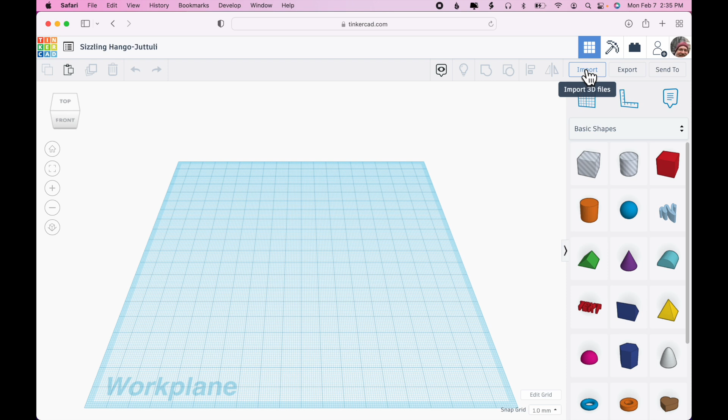So let's get started. Create a new design. You should know now that you can drag these primitive shapes out onto the work plane and build your model from scratch. But you'll notice that there's an import button up here, which implies that we can import files as well. You'll see that Tinkercad supports STL, OBJ, and SVG files.

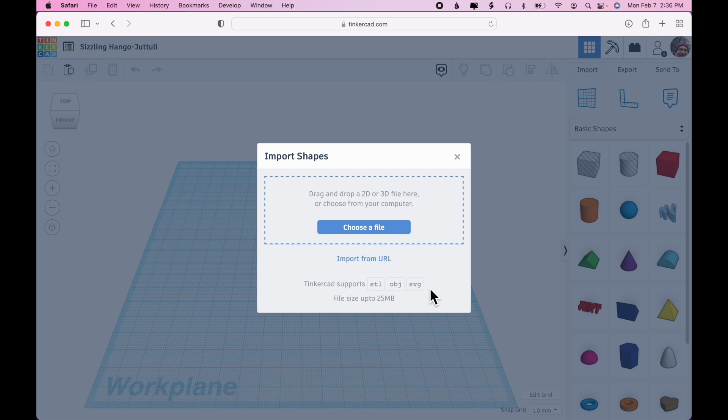STL files you're familiar with, that's what we bring into our slicer to prepare for printing on the printer. OBJ files, you'll get some experience with those in Forger 3D, the sculpting app. When you use that, you can export your sculpted models from Forger in OBJ format, which implies you could import those models into Tinkercad. So you can create a very organic shape in Forger and bring it into Tinkercad and add more geometric shapes to it. The third file type is SVG, which is a scalable vector graphics file format, a 2D image format. That is interesting as well.

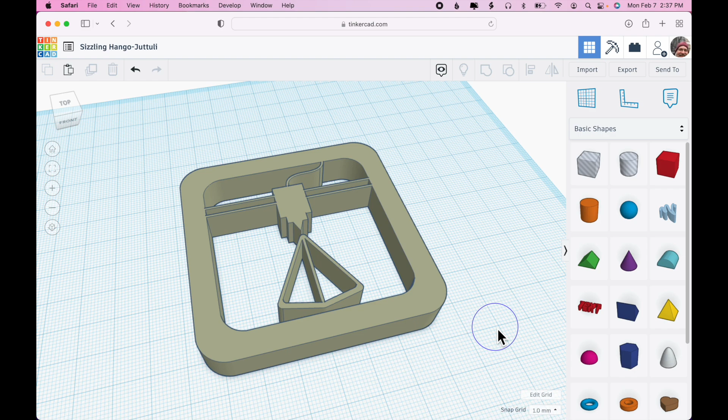What I'm going to look at now, I have a 2D logo image in SVG format. I'll choose upload, artboard, sure, just bring it in. Okay, there it is. So you can see what it did was Tinkercad took that SVG file and just gave it some dimension. And I'm not stuck with that - I can increase it, or reshape it any way I wish. Let's see, what did it give - a 10 millimeter height by default.

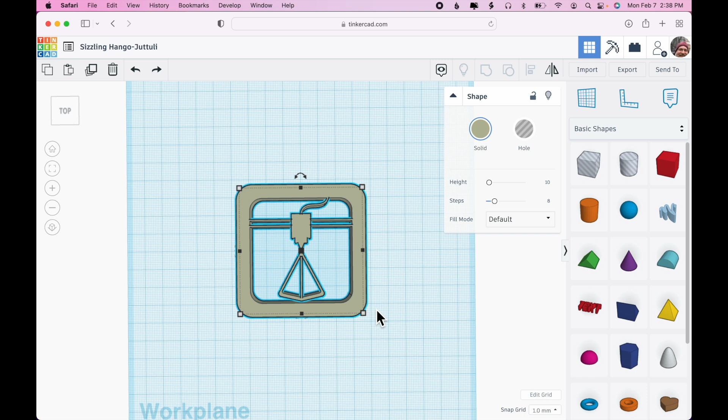What I think I'd like to do with this is create a kind of badge or magnet for the 3D Printing Club. So this is an original illustration, but I would like a background for it. And I could use just a round disc background or square or whatnot, but since it's a 3D Printing Club, I'd like something a little more technical.

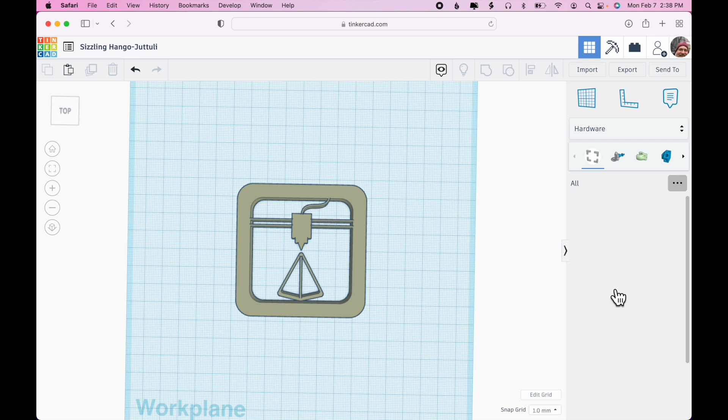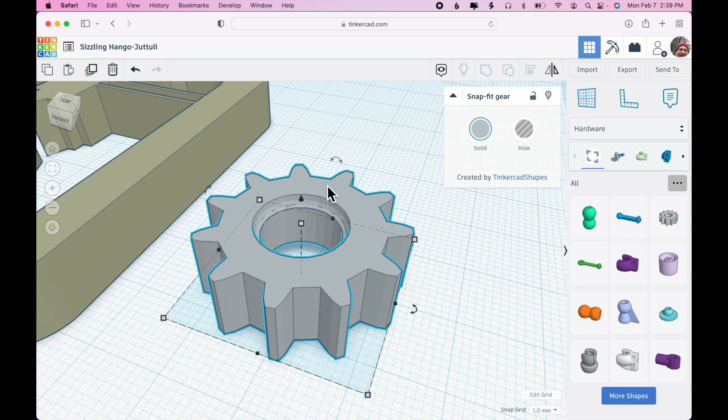So let's see what we have under hardware. There's a gear here, that looks pretty cool. If I bring that out, I notice it's called a snap fit gear. So if I hit the F key on the keyboard to zoom in and look at it, I can see that it's not flat on the inside there. Looks like the top is flat, but the inside, bottom, and top is angled a little bit. Plus there's a big hole in the middle, so I want to fill that in.

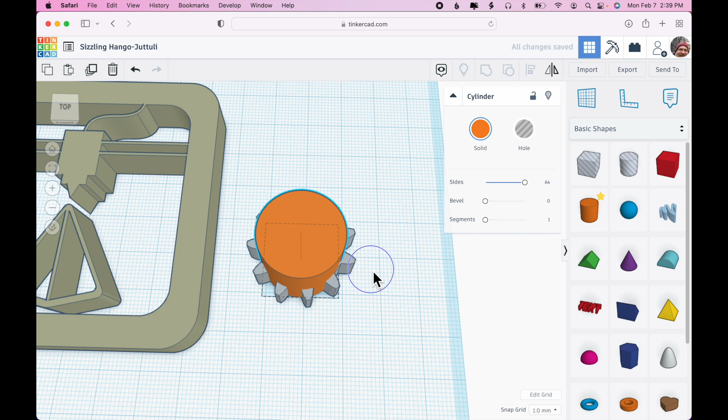I can go back to basic shapes, take out the cylinder, smooth the edges just so it's easier to see, move this over. The idea is I want to try to fill as much of that hole as possible, but it's kind of hard with this perspective view to see exactly what's going on. So over on the left-hand side, I'm going to switch to orthographic view.

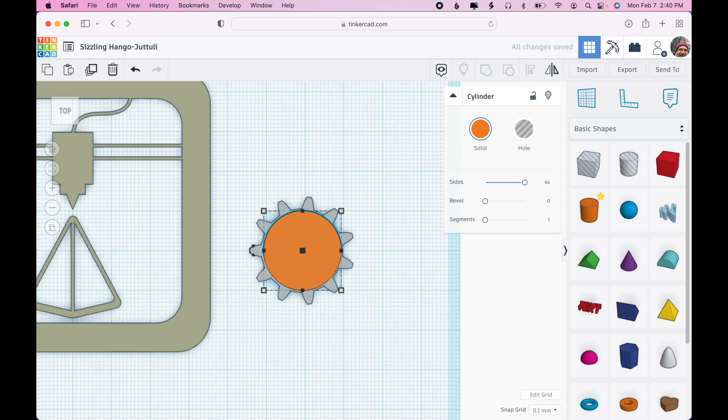And then if I hit top, now I'm looking straight down on those objects, and I can see exactly what's going on. I will turn off the grid so I can - well, I guess I want a little bit of movement here, nudge that over. Okay, that looks about centered. The gear is 9 millimeters tall, so I will make the cylinder 9 millimeters tall and combine.

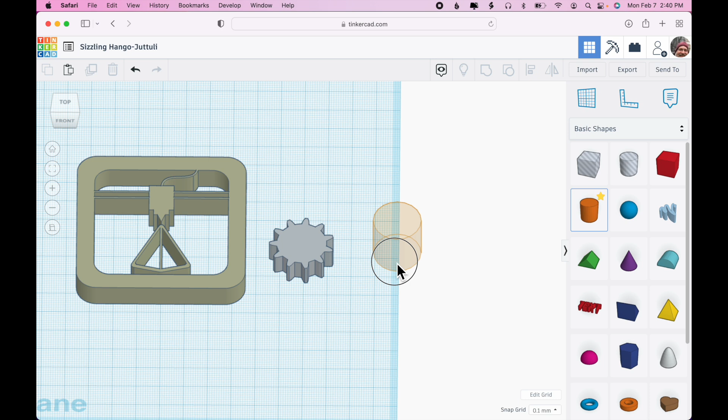One of the tricks I'd like to point out is that when I'm dragging a new shape out, I try to get the work plane so that I'm looking straight down on it, or at least at somewhat of an angle so that I can see exactly where I'm placing this thing. Because if I'm looking at an angle like this and I drag this out, I really don't know where it is, right? Whoops, if I tilt my screen, I have no idea where that thing is. Oh, there it is, way, way up there.

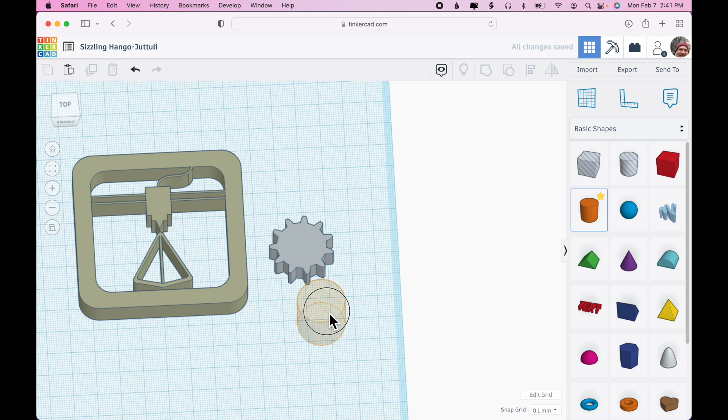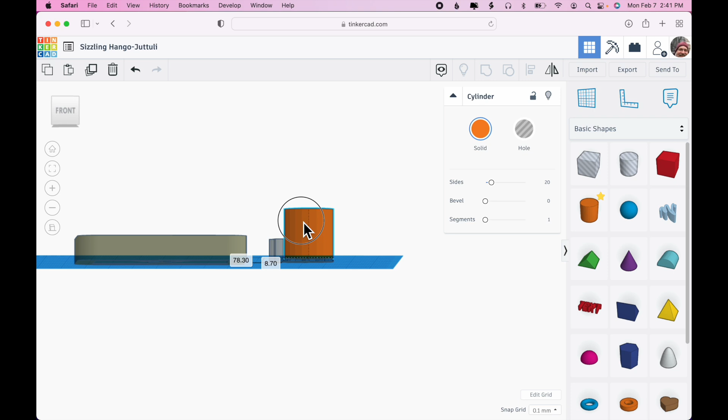So whenever you're moving anything in that direction, left or right, front to back, looking straight down is good. And when you're moving things sideways, you can also move the screen around so you can see better what's going on there. Because again, if I'm looking at it this way and I'm trying to move it forward, it doesn't seem to be working. Oh, there it is. Now it is, but I can't see what's going on because I'm not at an angle.

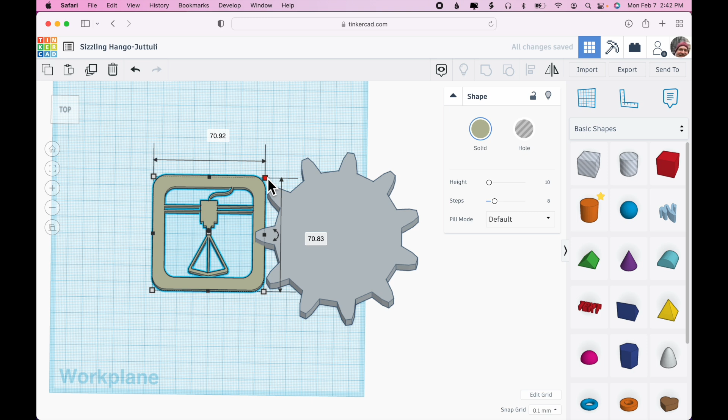So a tip there. Now I'd like to enlarge this gear, but I want to enlarge it proportionally. So I'm going to hold down the shift key and then grab a corner of the gear and pull it up - that will increase everything proportionally. Let's see, I'll shrink that proportionally. Okay, so it's hiding it. Let me bring that down, that over there. Select everything, and I'm going to center it.

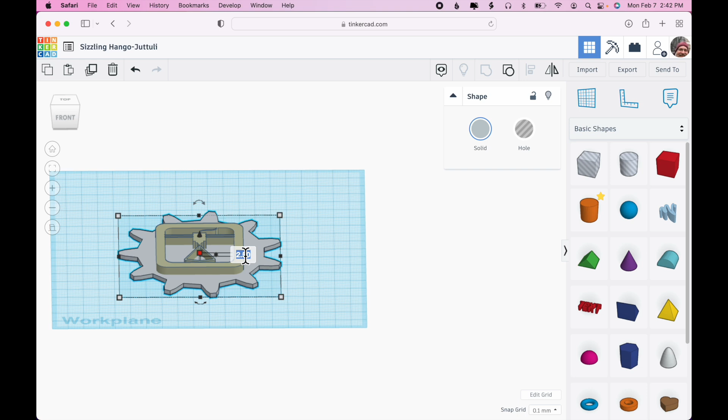Okay, well that looks pretty good. Before I export it though, I'm going to click on the gear and make that 1 millimeter tall, and the logo I'm going to make 3 millimeters tall. So it's pretty flat, but there's enough space in between because my ultimate plan for this is to print this in 2 colors - the gear will be gray and the logo on top will be another color.

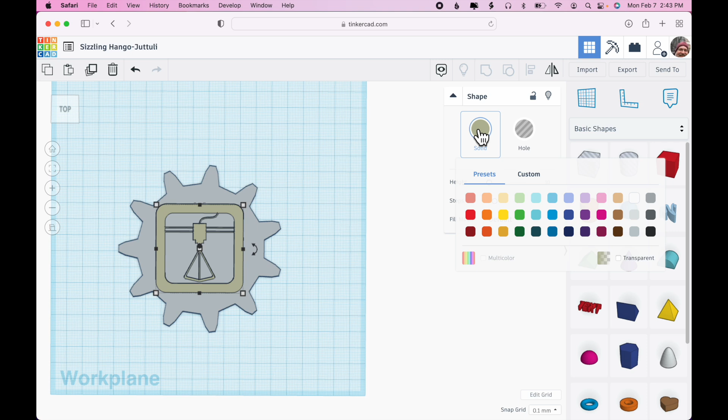Probably not tan, I don't know, maybe gold. Maybe instead of gray, I'll have a kind of maroon color. Maroon and gold are KVCC school colors, so maybe that would look good.

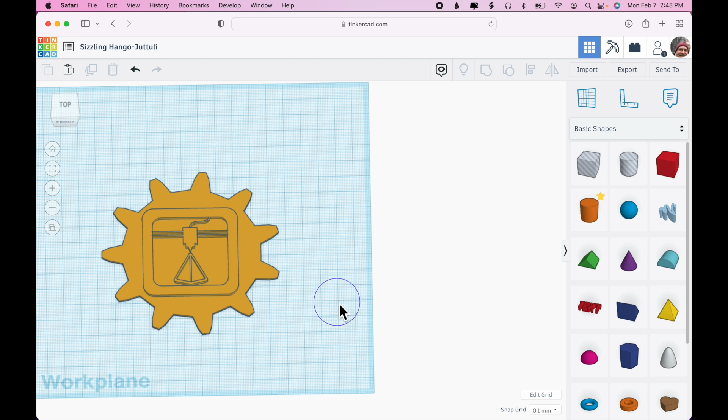So I can select those two and group into a single object. And notice it retained - whoops, no it didn't, it took the color from the logo. But if I click on the object and choose color and click multicolor, it'll show me the two separate colors that I had. Now I can go back into perspective mode and sort of look at it that way.

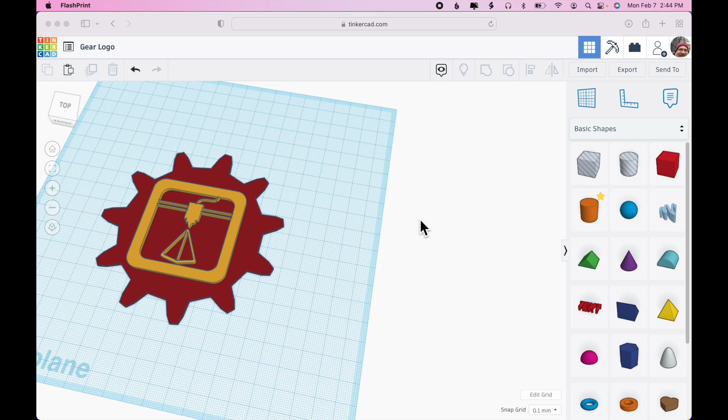All right, now I can export this. Oops, before I do that - give it a name, export as STL. Next, we'll open FlashPrint, slice the file, and print it.